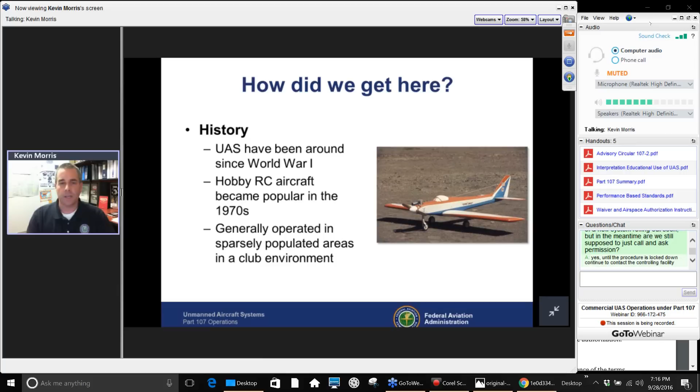So briefly, we want to go through the history of why we got here. UAS operations aren't new, they've been around a long time. You can go all the way back to the 50s and 60s with RC-controlled aircraft. It really became popular in the 70s, with folks building these from scratch or kits in their basement, forming clubs and operating in sparsely populated areas. This worked well for a long time.

In 1981, that's Advisory Circular 91-57. Currently we're on Advisory Circular 91-57A, a rewrite of this. But back in 1981 the FAA issued this saying, we recognize you're flying these model airplanes in the National Airspace System and staying away, so we came up with guidelines and operating standards, not a rule, but standards we expected the RC community to maintain. That worked well up until rather recently.

I believe this was in 2012. It changed because the knowledge and skill to operate remote-controlled aircraft changed. Back in the day you had to understand lift, thrust, weight, drag, and you spent time building it. Now you can have somebody walk into a store, buy a drone off the shelf, walk into the parking lot, hook it up to their iPad, and they're piloting a drone with no idea what lift, thrust, weight, drag means. That's not necessarily why Raphael Pirker got into a situation, but it's kind of what kicked this off.

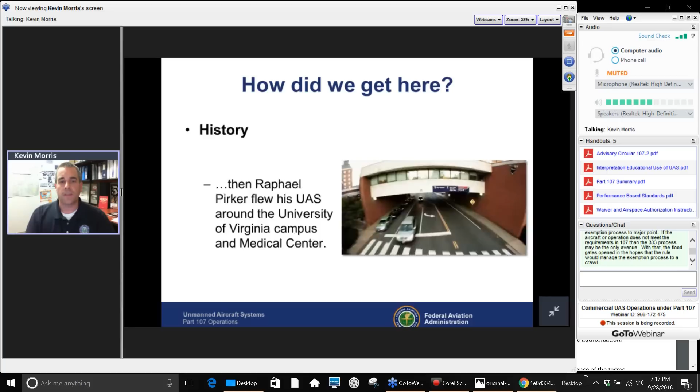Mr. Pirker operated his UAS around the University of Virginia campus and medical center, taking videos, swooping underneath and over and around heliports. That's what caught the FAA's attention. The FAA charged him with violating rules under Part 91, based on the position that unmanned aircraft systems, or UAS, are aircraft. He fought that and said no, it's a toy, it's my hobby.

We lost in the lower court. The lower court judge said, FAA, this is a toy, it's not an airplane, you have no standing. The FAA appealed that, and it got up to our highest appellate court, the NTSB. The NTSB affirmed the FAA's position: yes, unmanned aircraft systems are aircraft. That's the key decision we have right now and how the FAA got involved in all this.

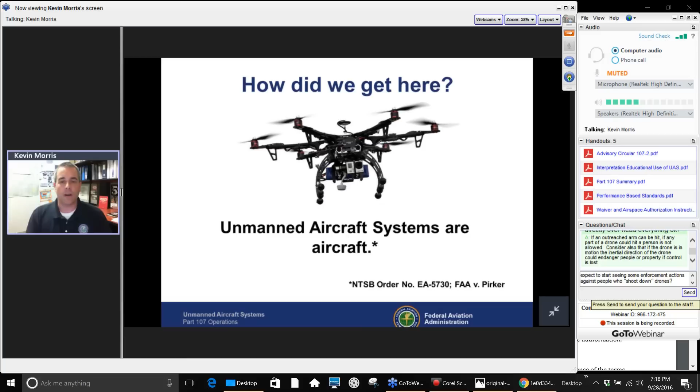Again, I'm not going to debate this. I know there are probably lawsuits and differing opinions on it, but as the law stands right now, unmanned aircraft systems are aircraft. You can reference that NTSB decisional order, FAA versus Pirker.

Shortly after that, Congress enacted the FAA Reauthorization Act, Public Law 112-95. This captured a lot of UAS or hobby operations. One requirement of this law was that the FAA establish a means for people to operate UAS commercially in the National Airspace System. The law goes into effect, and trumps congressional... well, it works the other way around, so we had to come up with a rule right away. That's where you got the exemption process, Exemption 333, our bridge from Public Law 112-95 over to Part 107 operations.

Many of you attending right now may have 333 exemptions, that was part of that process. Now, as of August 29th, we have FAR Part 107. This provides for civil, meaning commercial, UAS operations in the NAS, and it also certificates remote pilots. So that's where we're at today.

So I'm going to bring up another poll, the second one here, you should be able to see that pop up on your screen. It's discussing the experience you may have operating UAS. I'm going to let you answer that.

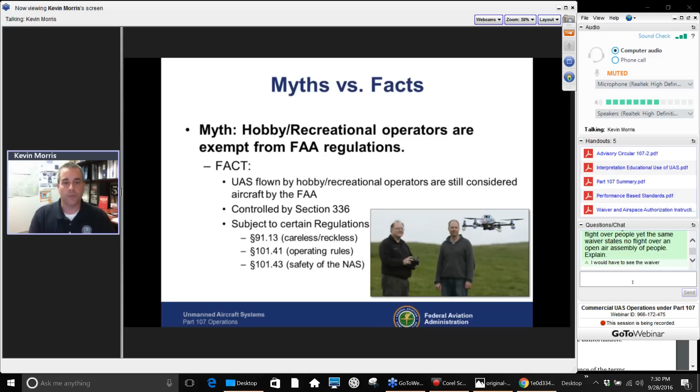Fact is, yes, we are responsible for the safety of all airspace from the ground up. This includes any airspace that is defined as navigable, and that extends to the surface. Aircraft have to take off and land. Unmanned aircraft have to take off and land. Therefore, they are navigating in airspace as soon as they come off the ground.

Where this came from, and what everybody likes to cite, is a 1946 U.S. Supreme Court decision under the U.S. versus Causby rule. So let me try to explain this a little bit. Again, we're not going to get into a heated debate on this. I'm sure there are opinions all over the place, but here's the deal.

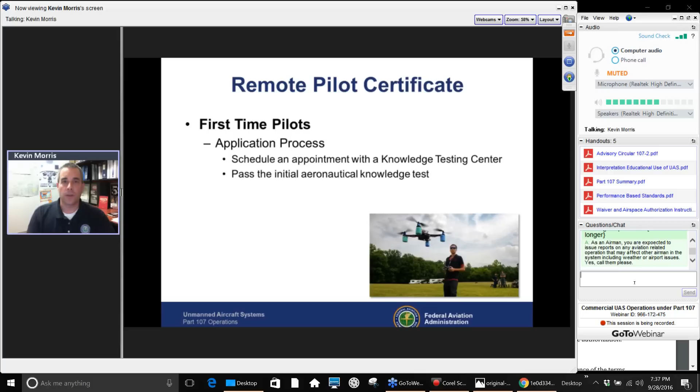After that, schedule an appointment with the Knowledge Testing Center and pass your initial aeronautical knowledge test. That test covers regulations relating to privileges, limitations, and operations, airspace, weather, loading and performance of the small unmanned aircraft, emergency procedures, and crew resource management, which may be a foreign term to you at this point. It also covers radio communication procedures, determining performance of your small unmanned aircraft, the physiological effects of drugs and alcohol, aeronautical decision making and judgment, airport operations, and maintenance and pre-flight inspection procedures. There's a lot of information you'll need to know to pass that exam.

Once you've passed the exam—and right now we're hovering around 87 to 88% success rate for people taking their exam the first time—that's a fantastic number. It means people are doing their homework.

Once you pass that test, you're going to complete your FAA Form 8710-13. What that really means is you go back into IACRA and complete a remote pilot certificate application. Once the TSA vets your background, you'll receive an automated email from IACRA allowing you to log back in and print out your temporary certificate. Later on, the permanent remote pilot certificate will be sent to you in the mail, but that's taking a while—some people are starting to get theirs now, but it'll probably come in waves. The key thing to remember for first-time pilots or non-current Part 61 pilots is that no additional signatures are necessary. You don't have to find a CFI, visit a physician, or find a designated pilot examiner. Just complete the application and submit it—Oklahoma City and Airman Records takes care of vetting and processing the application.

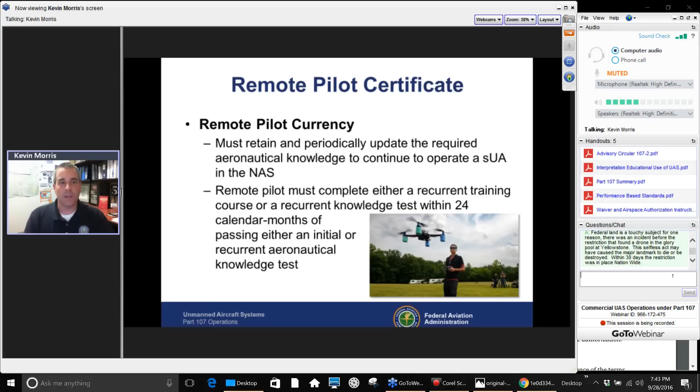This is done through either a recurrent training course or recurrent knowledge test, and it has to be done every 24 calendar months. What is that test going to be like? I don't know, we haven't issued it yet because nobody needs it yet. We just published the rule. Nobody has their certificates until at least August, or I should say nobody has to complete it until at least August of 2018. But here's kind of a good table.

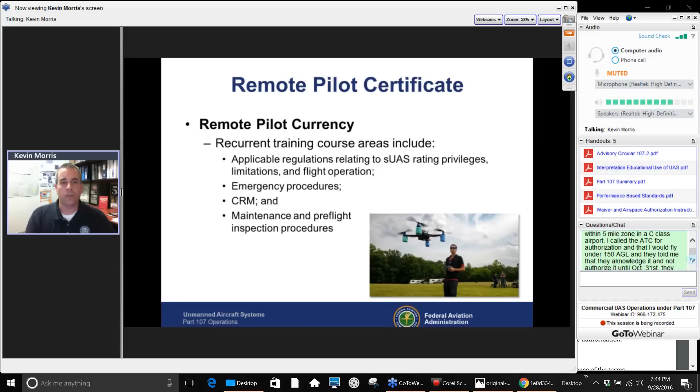The recurrent training course is going to include applicable regs, emergency procedures, CRM, maintenance and pre-flight inspection procedures. Again, we don't have the course developed yet, so I can't specifically tell you what it's like. Is it going to be the same as the UAG knowledge exam? Not quite sure, we'll have to wait probably a good year before we see some of that.

All right, so here we go. I hope you guys have your popcorn ready and your favorite beverage in hand because we're about to get into the meat of this presentation. I do have a planned break ahead, probably another 25 minutes before we hit that mark.

Bear with me as we get into the rules here with 14 CFR Part 107. We are going to go through every rule. For those rules which aren't that clear, or I felt need to be explained in more detail, I'm going to do that. But some of the rules are pretty straightforward, so we're not going to spend a half hour talking about one particular rule when it's easy to understand.

The first thing, Part 107.1, applicability. So who does this rule apply to? Every one of our rules starts out with a .1 applicability section. This particular rule applies to registration, airman certification, and operation of small unmanned aircraft systems within the U.S. We're talking civil, commercial UAS operations. It doesn't apply to air carrier, any aircraft subject to Part 101, which includes hobbyists and models, or operations under Section 333.

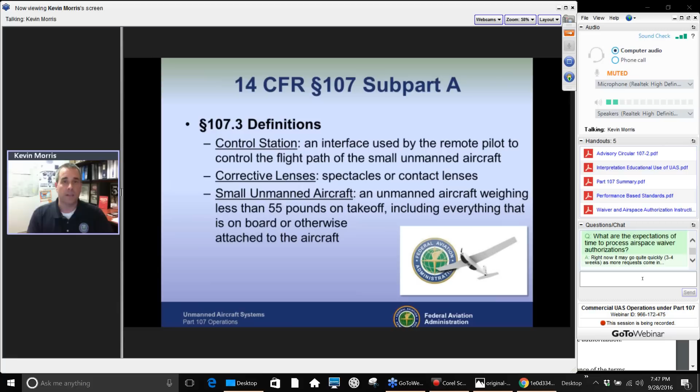Part 107.3 goes into definitions. We define what a control station is, what corrective lenses are, what a small unmanned aircraft is. For this rule, a small unmanned aircraft is anything weighing less than 55 pounds on takeoff, including everything you may attach to it, everything on board, cameras, whatever it happens to be. That means if the small unmanned aircraft weighs 60 pounds, you may not operate it commercially under Part 107. 107 only applies to small unmanned aircraft, which we define as something that weighs less than 55 pounds on takeoff.

We talk about unmanned aircraft systems, small unmanned aircraft system. When we're talking about sUAS or UAS, we're talking about everything involved - the aircraft, the data link, the control station, the flight controls, the computer software required to run it. That is the small unmanned aircraft system, kind of a holistic approach to it. Otherwise, we're talking about unmanned aircraft, and that's specifically the device that's flying in the National Airspace System.

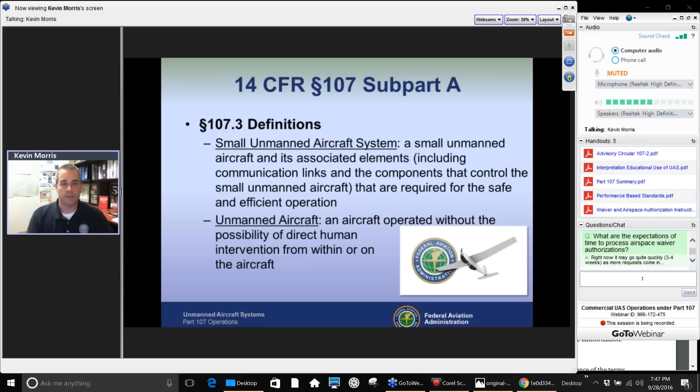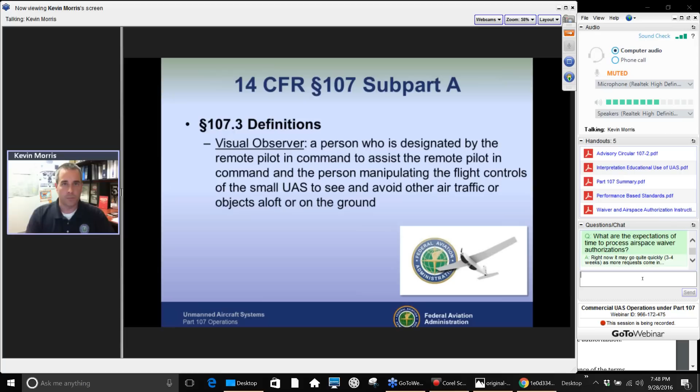Visual observer is defined - we'll talk about this a bit later, but a visual observer is designated by the remote pilot in command to help them keep the UA in visual line of sight at all times. It's not meant to be a daisy chain extension - it's not meant to be, I've got a visual observer a mile away, so I'm going to fly it over his head and then go a mile beyond him. I can't see it, but he can. That's not how the visual observer system works. So hang with me, we'll get there.

107.5 talks about falsification, reproduction, or alteration, essentially saying you cannot do anything that falsifies any record required by the FAA - that's your remote pilot certificate, could be an operations manual as part of a waiver you've received, certainly would apply to your waiver or ATC authorizations. You can't alter or falsify any of that. Registration would be followed too. If you do, you're looking at some pretty serious consequences - denial of application, denial of your certificate of waiver, suspension or revocation, or even civil penalty. We at the FAA can fine people for violations of the regulation. From personal experience dealing with cases involving falsification, it's generally revocation. It's one of the few things the FAA doesn't take lightly. This is highly an honor-based system.

We don't have enough inspectors to watch what you do every single day in the field. We are not going to be there for every single takeoff and landing. We expect you to operate as professional pilots in the National Airspace System, and as such, falsification goes against every ethical standard we'd have as a professional. I've seen the FAA go very diligently after pilot certificates for falsification. So it's certainly something that's real, and it's certainly something that's very uncommon. I should emphasize that.

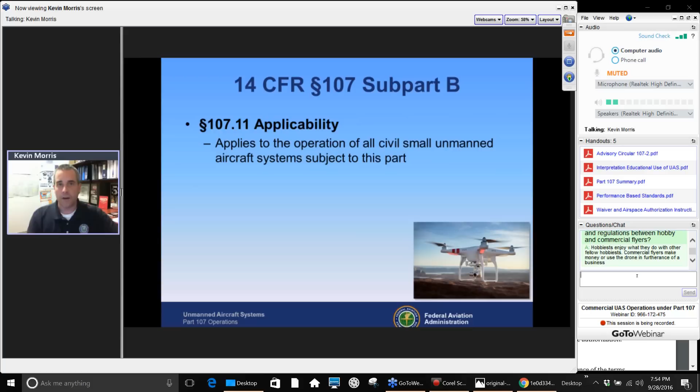Now, which ones are subject to this part? We covered that in 107.1, which is anything that's under 55 pounds, so on and so forth. We do require you to have a remote pilot certificate with a small unmanned aircraft system rating.

The rule reads: except as provided, no person may manipulate the flight controls of the small UAS unless they have a remote pilot certificate with a small UAS rating, or that person is under the direct supervision of the remote pilot in command, and the remote pilot in command has the ability to take direct control of the flight of the SUAS.

I apologize for reading that word for word, but some of these I unfortunately have to do that. The key point is that whoever is operating the SUAS under Part 107 has to either hold a remote pilot certificate issued under this part, or have that person who holds a remote pilot certificate standing right next to them with the ability to take command if something goes wrong. So that's the difference: you can have somebody operate your small unmanned aircraft under Part 107 without a remote pilot certificate, as long as somebody who has a remote pilot certificate is near them.

Now we get into remote pilot in command. You have your remote pilot certificate, and the FAA has this other thing called remote pilot in command. Folks who hold Part 61 pilot certificates are very familiar with the term pilot in command, so I'm going to bring it to you guys as well. The rule states: except as provided, no person may act as remote pilot in command unless they have a remote pilot certificate with a small UAS rating. We require a remote pilot in command on every flight.

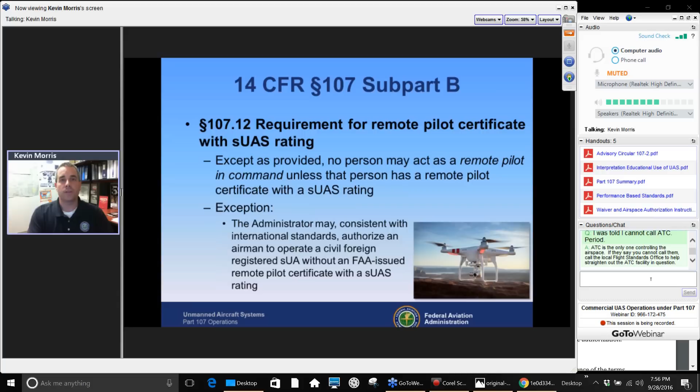There is an exception in there dealing with civil, foreign, registered, small unmanned aircraft — I'm not going to really get into that. For our discussion, every single UAS flight under Part 107 must have a designated remote pilot in command who holds a remote pilot certificate. As you saw in the previous slide, that person doesn't necessarily need to be flying the UAS, but if they are not, they need to be right next to the person that is, particularly if that person does not have a remote pilot certificate.

We do not require medical certification for you to operate your UAS under Part 107. You don't need a third-class medical, and you don't have to visit an aviation medical examiner. However, if you have any reason — whether you know or have reason to know — that you have a physical or mental condition which would interfere with the safe operation of the SUAS, you may not operate under Part 107.

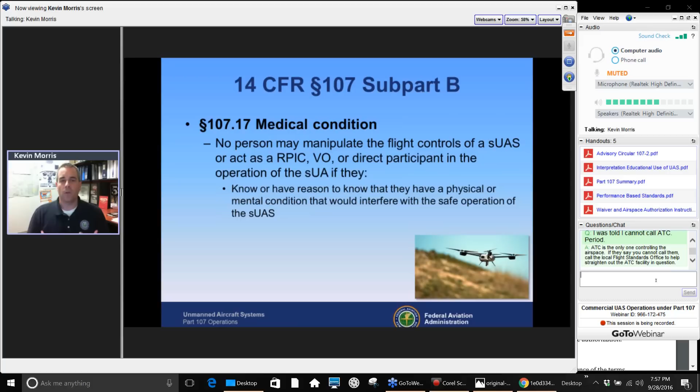This is a big self-certification piece. If you go out with some sort of medical issue, or should know that you have a medical issue, and you choose to operate and something goes wrong, the burden is on you for that medical self-certification. You can't say, 'I know I couldn't see straight yesterday, but I decided to fly anyway and I hit a tree.' If you can't see straight, how did you have reason to believe you wouldn't interfere with safe operation? The bottom line is it's self-certifying — are you physiologically capable of flying that UAS safely? That's what we need to know.

So again, a remote pilot in command, under 107.19, must be designated before or during the flight of the small unmanned aircraft. They are directly responsible for and have the final authority as to the safe operation of that small UAS in the NAS. They have to ensure it doesn't pose any undue hazard to other people, aircraft, or property in case that UA loses control for any reason. They must ensure the UAS complies with all of Part 107.

If you're the remote pilot in command, you are the captain of that aircraft — you're wearing the four stripes. You go to the airline terminal, see the pilots walk around with four stripes on the shoulder, they're the captain, they're the pilot in command. You guys are going to be the remote pilot in command of your aircraft. You must have the ability to direct the small unmanned aircraft to ensure compliance. You're in charge — it all falls on your shoulders.

One of the things an FAA inspector could ask if they visit you during a mission is to see your remote pilot certificate, if you're going to be the remote pilot in command. You should have that with you, not at home or in your car. It's something you carry with you, just like all manned aircraft pilots carry theirs at all times. I recommend the same for you guys.

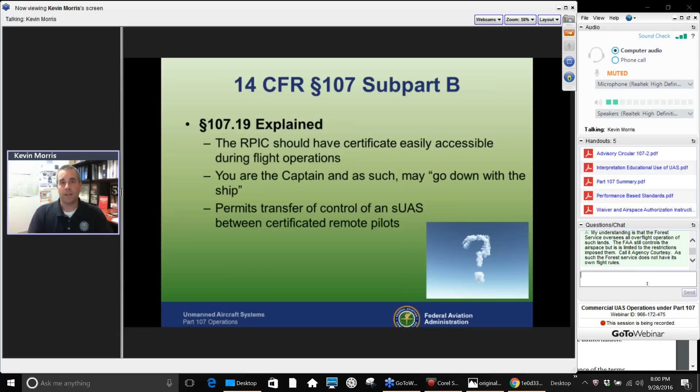What 107.19 does allow is transfer of control of a small UAS between certificated remote pilots, meaning you can pass off that remote pilot in command responsibility. In transferring control, both of you must be capable of maintaining visual line of sight without any loss of control. It can't be done where one of you loses sight of it momentarily. The transfer must happen while both of you can see the UA. So you have one pilot designated as the RPIC at the beginning of the flight, and at some point during the operation you can transfer that responsibility and control, as long as it's done in a positive manner so that nobody is doing this when something goes south.

So if you're going to be transferring remote pilot command authority, it must be clear and unambiguous, meaning: 'You've got the aircraft, you're remote pilot command.' 'Roger, I've got the aircraft, I am remote pilot command.' However it works out. What you don't want to have happen is, 'I think I passed it off to that guy,' and now it just went through the school window, and the FAA and the police just showed up, and he was the remote pilot command, and he's like, 'Well, no, you were the remote pilot command, I never took it.' That has to be positively communicated between the two of you.

If you have an in-flight emergency requiring immediate action, you may deviate from any part of this rule to the extent necessary to meet that emergency. It doesn't give you a blank check to violate every rule in the book, but it gives you the green light to deviate from any rule in this part needed to ensure the safety of the NAS. If something's going wrong with your UAS, an in-flight emergency, whatever it happens to be, do whatever it takes to keep the national airspace system safe and keep people around you safe. You are the captain. You save the ship, you save the people. That's your job. Deviate from the rules as necessary.

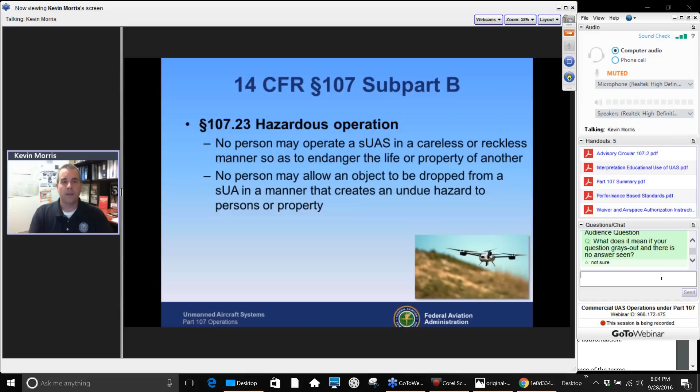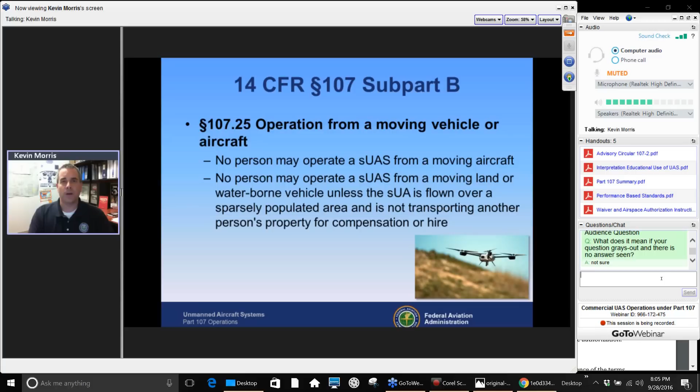If the FAA inspector comes out and says, this is like the middle of downtown Atlanta, where are you getting that from - that will be up to you and the courts and something to decide later on. But we do not define sparsely populated area. So you can Google it and try to find some answers. Some lawyers have written about it in different cases, but officially there's no definition for that.

So again, you can operate from a land or waterborne vehicle over a sparsely populated area. It doesn't remove any visual line of sight requirements. You still have to maintain VLOS with your small UA, and you got to make sure that it doesn't unfairly risk any people or property or anything of that nature.

Alcohol or drugs. Right now we have a rule in 107.27 that redirects you to another rule in Part 91. This is fairly common when you get into reading FAA regulations. Any Part 61 certificated pilot will tell you that you read one rule that references this, unless this rule over here says this, which ties you to that rule over there. It's how the rules are written. So welcome to the FAA, welcome to our rules.

107.27 will redirect you to 91.17 and 91.19, which state within 8 hours after consumption of alcohol, you may not operate the UAS. You got to have what the pilots like to say, 8 hours bottle to throttle. You got to have that time in between. If you're under the influence of alcohol or any drugs, or if you have a blood alcohol content of 0.04 or greater, you may not operate under Part 107.

Daylight. You may not operate at night. You may operate in periods of civil twilight, as long as your small unmanned aircraft have anti-collision lighting on it that can be seen for at least 3 miles.

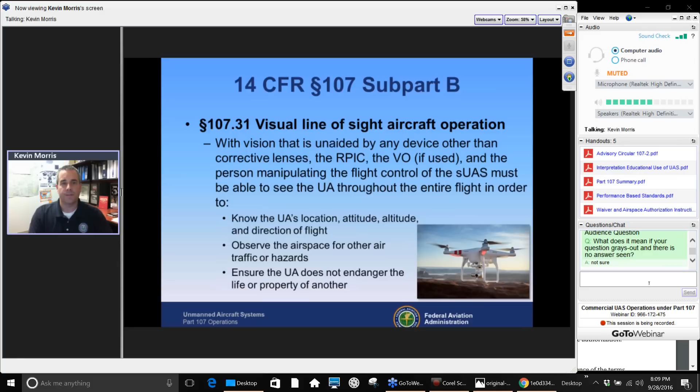That has to be done by the remote pilot in command and the visual observer. You can't pass that off. It has to be within visual line of sight at all times. So throughout the entire flight, that ability must be exercised by either the remote pilot in command of the sUAS or a visual observer.

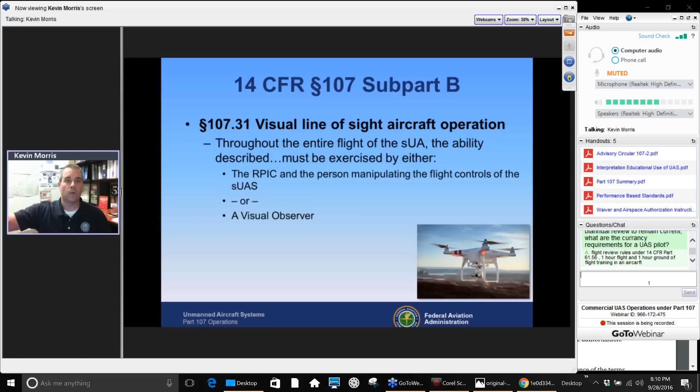I'm going to explain this real quick. The intent of the visual observer is not to relieve the remote pilot in command of VLOS responsibility. It's designed to allow the remote pilot in command to temporarily lose visual line of sight with his UAS by looking down, adjusting something, or working on a system or software component. The visual observer can maintain visual line of sight with the aircraft while the remote pilot is heads down. It doesn't mean the device can be flown somewhere the RPIC can't see it, but the visual observer can. So if a visual observer is used during that operation, all the following requirements must be met.

The remote pilot in command and the visual observer must maintain effective communication with each other at all times. That means I have to be able to talk to you, and you have to be able to talk to me. That can be done electronically, walkie-talkie, cell phones. We don't get into too much detail, but we do specify effective communication. Whatever medium you use between the remote pilot in command and your visual observer, it has to work. It has to be effective.

The remote pilot in command must ensure that the visual observer is able to see the UA in the manner specified previously. Again, it has to maintain visual line of sight. We don't have a rule that permits beyond visual line of sight operations.

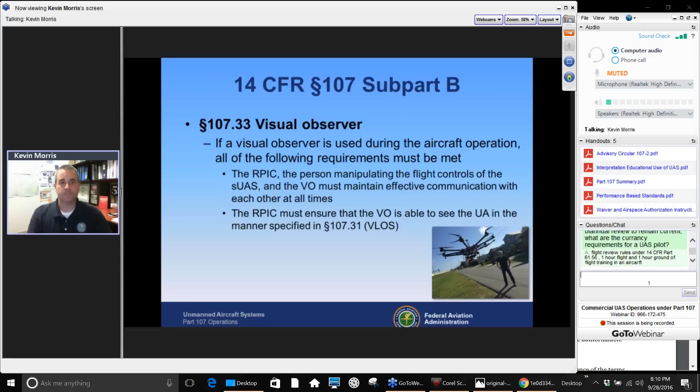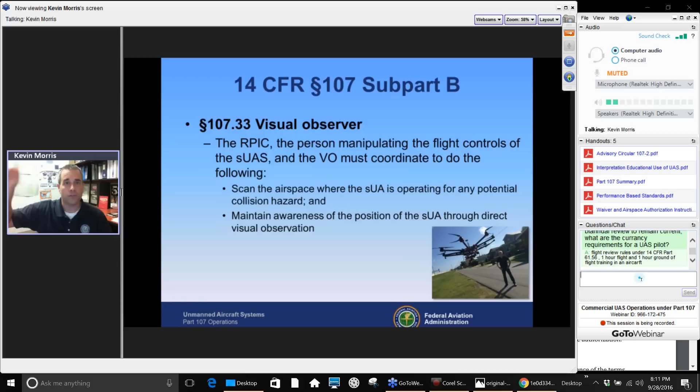Coordination between the two is outlined in 107.33 between the visual observer and the remote pilot in command. This coordination is designed to scan the airspace where you're operating your small unmanned aircraft, identify any potential collision hazards, and maintain awareness of the position through direct visual observation. That ties to me as a remote pilot looking down, temporarily adjusting something. My VO is watching my UAS, whether it's in hover mode or tracking a GPS track. I have the ability to maintain visual line of sight because I can always look up and see it, but they are physically eyes on the bird at any given time.

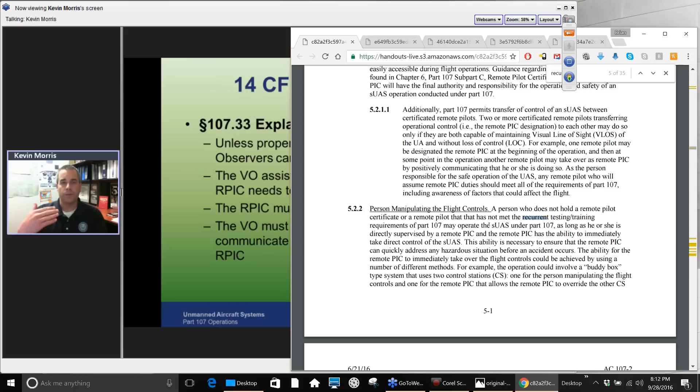Now, unless properly certificated and equipped, visual observers cannot assume remote pilot in command responsibilities. You can't pass off your RPIC duties to your visual observer unless they happen to be a remote pilot with that certificate and accept that responsibility. So they assist you: if you go eyes down, the visual observer is there to assist. You, as remote pilot in command, must still be able to see your unmanned aircraft within visual line of sight at all times. This doesn't relieve anybody of that, and effective communication must take place.

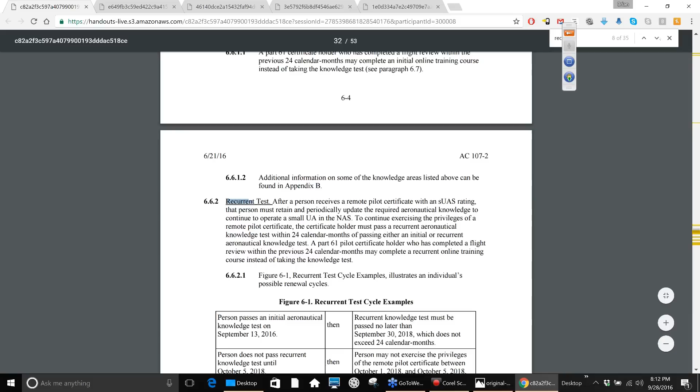Don't necessarily care how you do it, but you have to have effective communication between the visual observer, because if the visual observer is far enough away where maybe they can't shout at you very effectively because of highway noise, and you go heads down and they see something happening that's dangerous, they have to be able to communicate with you instantly, whatever means you do that. So that could be voice, handheld radio, any real method that creates effective communication and does not create a distraction. Texting probably isn't the best idea to maintain effective communications between a VO and the RPIC.

In terms of operating multiple small unmanned aircraft, you may not. A person may not operate or act as a remote pilot in command or visual observer of more than one unmanned aircraft at the same time. Now, this is going to be one of those rules that's waivable. We'll get to that here in a little bit.

You cannot carry hazardous material. And for the purposes of Part 107, we define hazmat as, I'm just going to let you guys read that. It goes to the Secretary of Transportation. It talks about health and transporting and commerce, things like that. We pull the definition out of 49 CFR 171.8. So that's how we define hazardous material.

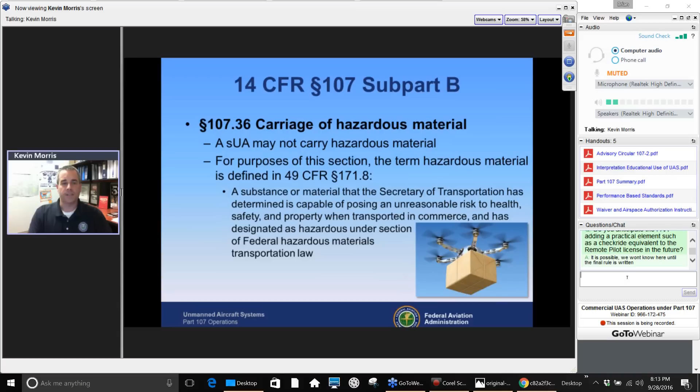All right, pretty exciting stuff there. I'll give you guys a second to read that and jumping forward.

If you're going to operate near aircraft, here are the right-of-way rules under Part 107. You must, as a small unmanned aircraft remote pilot in command, yield the right of way to all aircraft, airborne vehicles, launch, and re-entry vehicles. You have the responsibility to get out of the way. In terms of operating near them, you may not pass over, under, or ahead of it unless you are well clear. What does well clear mean? Look at it from a safety standpoint. You want to be so far away that it's not going to create an undue hazard. Be well clear. You may not operate so close to another aircraft to cause a collision hazard. Pretty self-explanatory on that one.

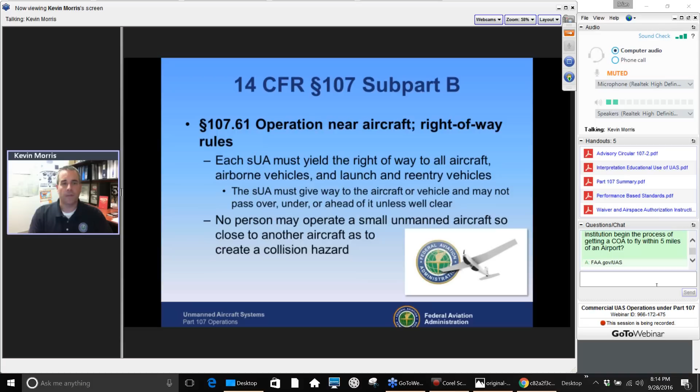Operating over people. Oh, this is a good one everybody likes to talk about, and especially since our administrator mentioned it was one of the first rules that we're going to be looking at here short term to potentially modify. We'll have to see. But 107.39 prohibits operating over a human being. Apparently aliens are okay, unless that human being is directly participating in the operation of that small unmanned aircraft, or they're located under a covered structure or inside a stationary vehicle that provides reasonable protection in case that UA came down on their head. The first bullet point under there is where everybody starts to kind of diverge in terms of who is directly participating in the operation of that small unmanned aircraft.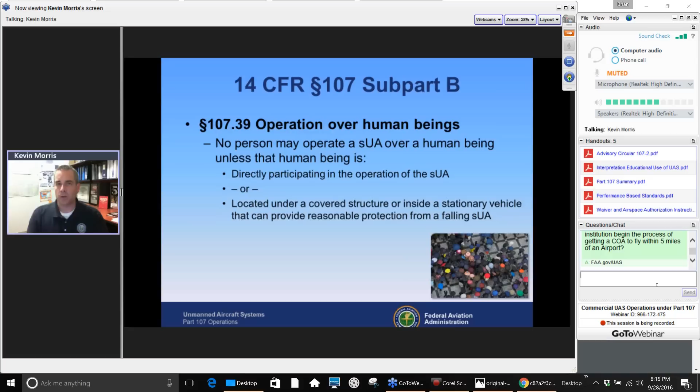So here's what we define. This, I believe, comes straight out of Advisory Circular 107-2, which is one of the handouts you can download. People directly involved with the operation of the small unmanned aircraft system are the remote pilot in command, or another person manipulating controls as provided by rule here, the visual observer, or any crew members necessary for the safety of the small unmanned aircraft system operation as assigned and briefed by the remote PIC.

So one of the questions we get a lot, what about actors? What about the movie talent or whatever it happens to be? Are they participating in the operation? Because we're filming their scene with the UAS. The way this reads is no. The actors or talent involved are not directly participating in the operation of the small unmanned aircraft system. You got to look at those 4 bullet points. The people you can fly over legally under Part 107.39 are one of those 4 groups. Either the pilot in command, manipulating the controls, the VO, or crew members necessary for the safety of the operation. Actors, talent aren't necessary for the safety of the operation. Filming a marathon, you can't tack up a sign that says, hey, we're going to be shooting this marathon with the UAS. You guys are all participating now. Doesn't work like that. They have to be directly related to the safety of the UAS operation.

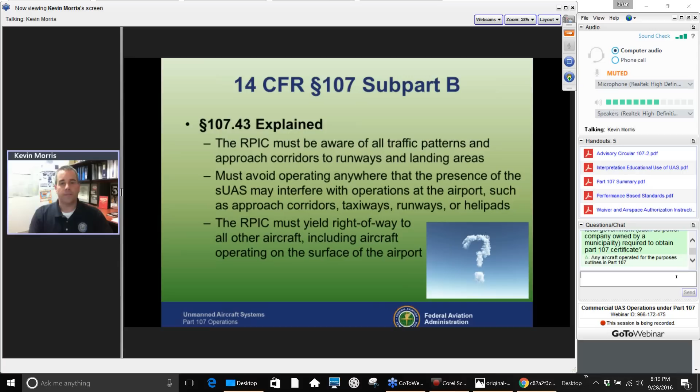One of the explanations given in Advisory Circular 107-2 is this: if you're hovering your unmanned aircraft 200 feet above a runway, and let's say there's no other airplanes around and you've done your due diligence, and now an airplane taxis up and is holding short of the runway, and they cannot take off because you're hovering over there - in effect, you have interfered with the operations at the traffic pattern at an airport. It would be in violation of 107.43.

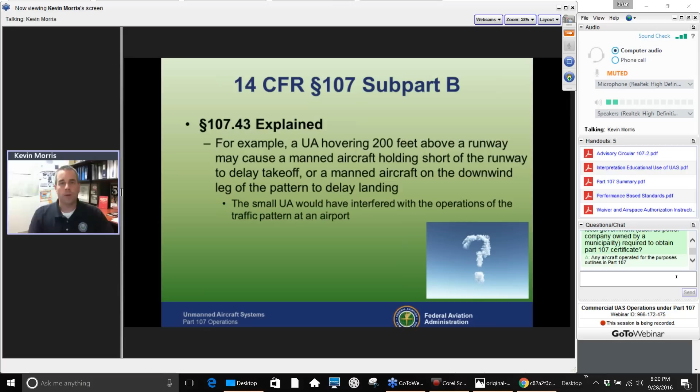So before you go carte blanche operating into airports in Class G, or heliports, or seaplane bases, have a very good understanding of how that airport operates. How do you do that? Contact the airport operator. Open up that dialogue, open up that discussion. Be safe.

Operating in prohibited or restricted areas is not that different from manned aircraft. You may not operate a small unmanned aircraft in prohibited or restricted areas unless you have permission from the using or controlling agency, as appropriate. For folks that aren't really in tune with how that works, what is the using agency or controlling agency?

So what I have on the screen now is a restricted area. This is straight off a sectional chart. Now, keep in mind, this is not a lesson to teach you how to pass the UAS knowledge exam, but I want to emphasize this part here, 107.45. Restricted area 4301 shows up on the map. I'm going to try something which to me is next level cool, because I'm a little bit old.

Say you wanted to operate in this area here that I've circled on the map, horribly. Could you? How do you know? Does it go to the surface? Who do I contact? Is it part of this Miller Army Air Force base? What is that?

So here's what we do. You have to look at the side panel of the sectional. If you've never owned a sectional, they're getting harder to find these days, but go out and try to find one. This is what the side panel looks like, for the particular Twin Cities sectional chart. If you go down, you find the special use airspace and see, oh, restricted area R4301, that's the one I want to operate in. Oh, it goes up to 27,000 feet.

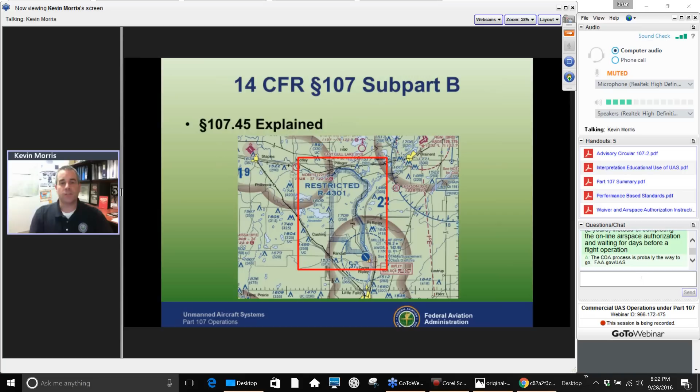Now, they will probably most likely coordinate with Fort Ripley, Camp Ripley in that area, but that's who the controlling agency is, Minneapolis Center, and that's how you find out. That's the same for prohibited area, restricted area. A lot of military operations areas are the same way.

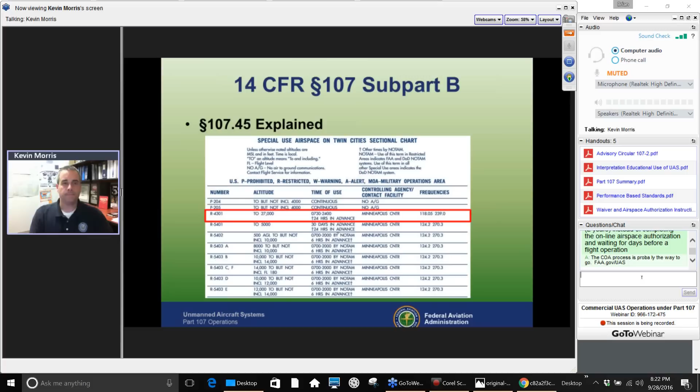This rule 107.47 is the TFR rule. Essentially, we identify, like you're now starting to get used to, we redirect you to part 91.137 through 145 and 99.7, what really amounts to TFRs.

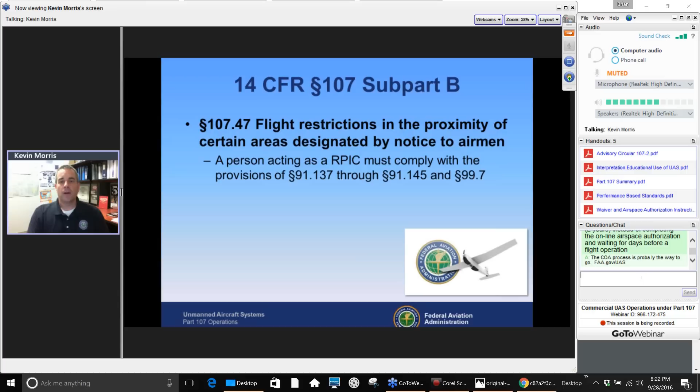So you may not operate a UAS in TFRs, whether it's in the vicinity of a disaster hazard area, national disaster areas in the state of Hawaii, emergency air traffic rules, flying too close to the President of the United States or other dignitaries.

Or flying too close to where they're doing space launches off of Cape Canaveral, or we have a rule for abnormally high barometric pressure conditions.

There's also kind of the permanent TFR that exists, which is the stadium TFR, people like to call it, that exists over certain stadiums of a seating capacity and type of venue.

Regardless of which TFR it happens to be, no UAS operations are permitted inside a TFR.

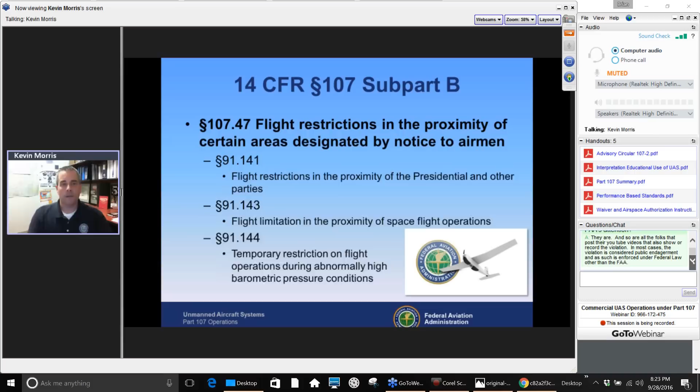I got a couple more on here, I guess, but essentially they're saying the same thing. TFRs, no fly. If you got a TFR active in the area, you're not going to go flying that particular day. And I'll show you how to find out here later on.

You are required to do a pre-flight on the UA. You can't just unpack it out of its shipping crate or unpack it out of its protective case and launch it. You have to, as the remote pilot in command, assess the operating environment, consider all the risks to people

or property in the immediate vicinity, on the surface, and in the air. These are things that you have to do prior to flight, not just one flight, all flights.

You have to complete this. Your assessment must include local weather conditions, airspace, and any flight restrictions, i.e. TFRs, the locations of people or property on the surface, any other ground hazards which may play a role in

your operation. And you must ensure that everybody directly participating in the UA operation is informed about the operating conditions, emergency procedures, so on and so forth. This gets back to people who are participating in the direct operation of your small unmanned aircraft.

Back when we were talking about operating over people, this is the briefing that you have to give them. You have to ensure that anybody participating in that safe operation knows the operating conditions, emergency procedures, contingency procedures, roles and responsibilities, potential hazards. That's your responsibility as a remote pilot in command.

There's a lot of responsibility on your shoulders. You have to ensure that all control links between the station and the unmanned aircraft are working properly, and you must ensure that it has enough power to fly for your intended mission.

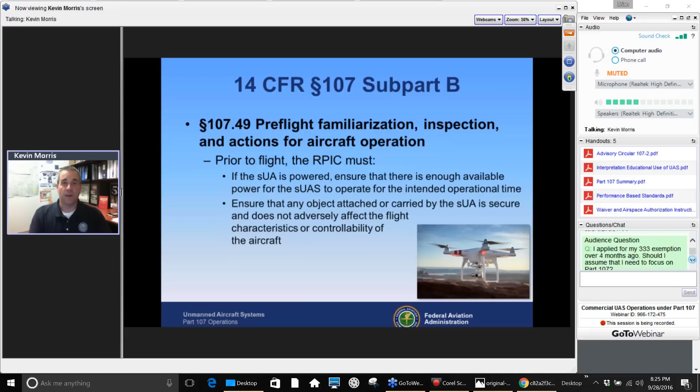This is similar to manned aircraft pilots, making sure there's enough gas in the tank to get where they're going. And make sure that anything you've got mounted on the bottom, GoPro cam, or whatever type of video device or sensing device, doesn't fall off, essentially what that boils down to.

We provide a lot of publications on this. We have topics on aviation weather, aircraft loading performance, emergency procedures, ADM, airspace. These are all free. You don't need to pay for any of these.

If you go to our FAA website and you find the handbook section, or use Google and just type FAA handbooks. All of them are in PDF format.

All of them are free. You can download that, put it in your tablet or computer, whatever device you want to use.

All right, but in addition to all that, make sure that the device is capable of flight. Do the propellers operate as they should? Do the control system operate as it should? Do you have adequate power? So on and so forth.

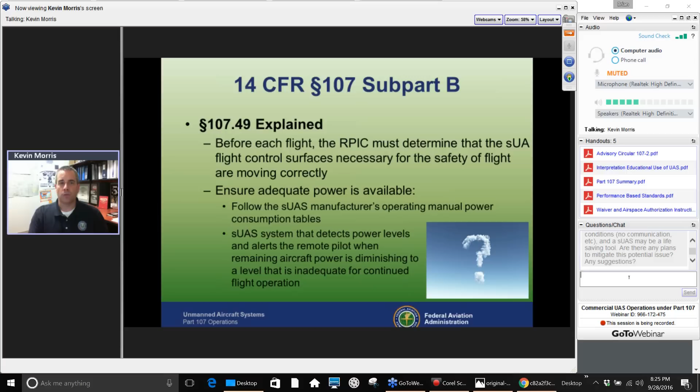Make sure that whatever you have at the bottom doesn't fall off, and then make sure that you have documentation with you. If you're operating under a waiver, you're going to want that waiver with you. You're going to want your remote pilot certificate with you.

You're going to want the aircraft registration with you. These are all things you have to have ready to go prior to flight. You are the captain, you need to have these documents with you.

Operating limitations: here's the nuts and bolts of actually flying the device. We limit it to a ground speed of no more than 100 miles an hour, and you have to have at least 3 miles of visibility observed from the location of the control station. So wherever you're at, you have to determine that your flight visibility is at least 3 miles.

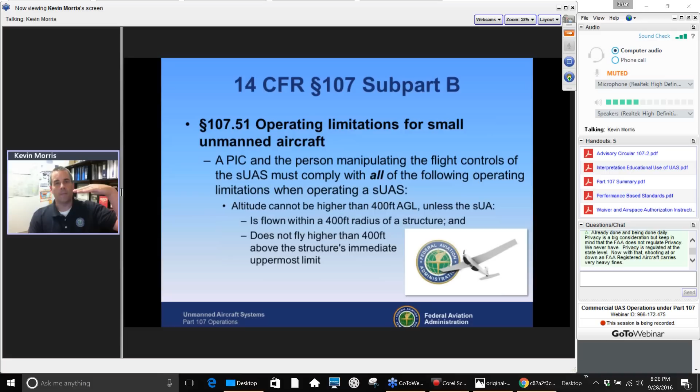You cannot fly higher than 400 feet AGL unless you're within a 400-foot radius of a structure. Then you may fly up to the top plus 400 feet above that structure's uppermost limit. If the radio antenna is 1,000 feet tall, you may operate within a 400-foot radius of that up to 1,400 feet AGL. That's what this rule permits you to do.

You do have to maintain cloud clearances. You have to be at least 500 feet below and 2,000 feet to the side of any cloud. You cannot fly above the cloud.

So why do we have these? Among other things, we want you to have the ability to make adjustments, to identify hazards and react to them, to make sure you're maintaining safety and taking appropriate actions.

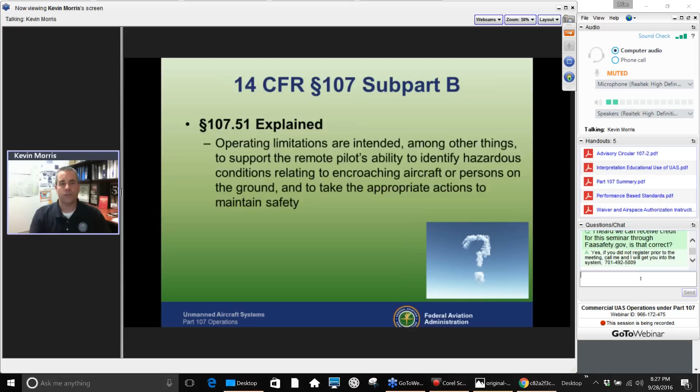There are a lot of different ways to determine ground speed. Quite frankly, if you own and operate a UAS, you know the best way for you to determine ground speed, but that's the controlling factor: ground speed.

Same thing with altitude. Most of these references are in AGL, above ground level, but you really want to understand the difference between MSL and AGL altitudes. If you don't, time to hit the books. But again, determining altitude is probably best left to you guys, since you know the UAS system best and how it relates that information to you.

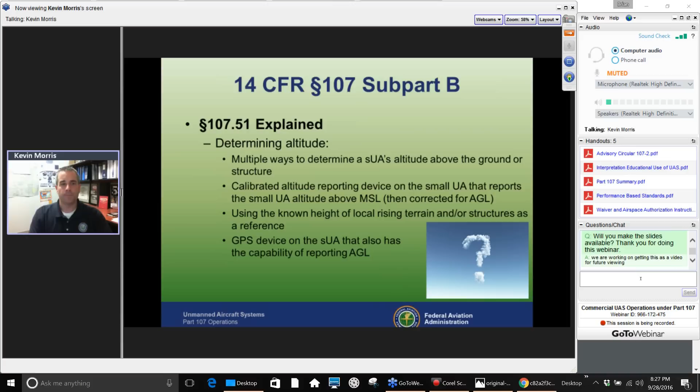Cloud clearances, how do we do that? Your eyeballs are probably the worst, most uncalibrated tool to determine cloud clearances. So the best way to do that is to obtain local weather reports in an aviation format.

Where are the clouds at? What are the bases of the clouds at? Because if I know the bases are at 1,000 feet, I know I have to be 500 feet below that, so I'm going to be limited. Even if I'm within a 400-foot radius of a structure, I'll be limited to 500 feet AGL max because of where the clouds are sitting.

Don't forget your local laws and regs. Just the state of Minnesota, I can tell you, is going to require that you register your UAS with them, that you have a commercial operating license with them, and that you prove minimum insurance requirements to them. The FAA does not require insurance.

We don't require a commercial operator license, so to speak. We issue registrations for $5, and we issue remote pilot certificates. That's our requirement. But every state's going to have their own set of rules, and if they don't have them now, they probably will very soon. Check with your state—just because you've met all the FAA requirements doesn't mean you've met your state requirements.

I can't emphasize enough, we don't regulate privacy at the FAA. That's not what we do, it's not what we have regulations for. But many cities and states do, and they have very specific privacy laws. And you're kidding yourself if you don't think they're talking about how to control privacy with drones right now, because they are. I've been involved with legislatures here in the state of Minnesota—it is a topic being discussed right now. So know your local laws.

All right, we are back. Here we go. Just a quick shot of numbers. It looks like nobody deserted us during the break. Hey, that's a good thing. Either you guys don't have a lot going on, or this is actually some pretty good stuff. Either way, I'll take that.

So we have a tremendous amount of questions rolling in. Thank you guys for all those questions. I know a lot of it has to do with ATC authorizations and clearances. I talked with Jay, who's kind of running some of the questions offline. He may have given some outdated information, so listen, follow, stay with me here. We're going to go through this, and I'll get you guys up to speed.

So other than the rule, this is what everybody wants to talk about: waivers and authorizations. Before we get going into waivers and authorizations, I want to talk about some definitions. There are so many of these definitions right now being used interchangeably out there. I've seen it online in social media forums, or I've just been talking with remote pilots or people talking about UAS.

I thought it'd be a good idea to clear this up a little bit. So the first thing I want to talk about is exemption. An exemption is a request made by an operator to not comply with the rule as written, but use an alternate method of compliance which ensures safety in the NAS. They are generally approved by headquarters. Think 333 exemption, all right? Those are issued to exempt commercial UAS operations from regulations, and they had a conditions and limitations section of that exemption which outlined the alternate method of compliance. That is an exemption.

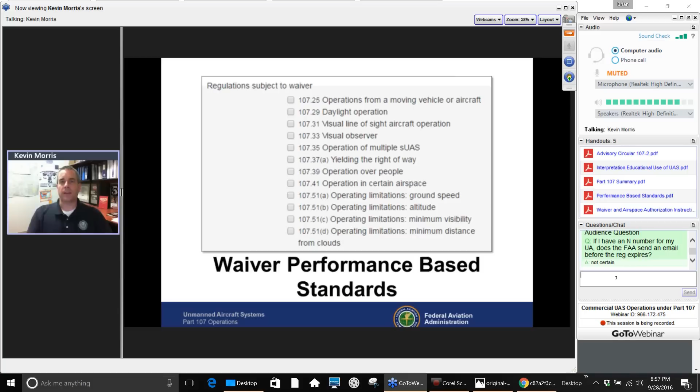So what are these performance-based standards? What do I have to identify to the FAA to move forward with my waiver request? So we may issue certificates of waiver authorizing deviations from any rule in 107.205 if the UAS operation can be safely conducted under the terms of that certificate of waiver, COW. So your request must contain a complete description of your operation, the justification that establishes the need for the waiver, and that it can be conducted safely under that term.

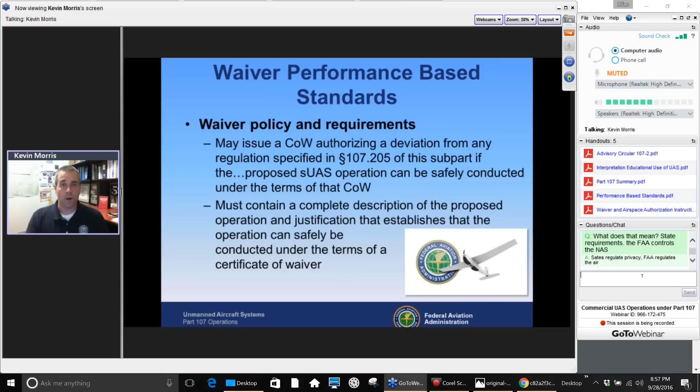We're not just going to be handing out waivers because you think someday you might decide to operate maybe at night. If we're going to waive a rule - and this isn't something we're making difficult for UAS, it's the same for manned aircraft - if we're going to waive a rule, there has to be a specific reason why. The rule is in place to ensure safety. What you're asking is to not comply with that rule, so we want to know why. So you're going to need a legitimate reason. Once you receive that waiver, you may deviate from the regulations of that part to the extent specified in your waiver. Simple as that. If there are conditions and limitations in your waiver, you must comply with those as well - all of them, not just one or two.

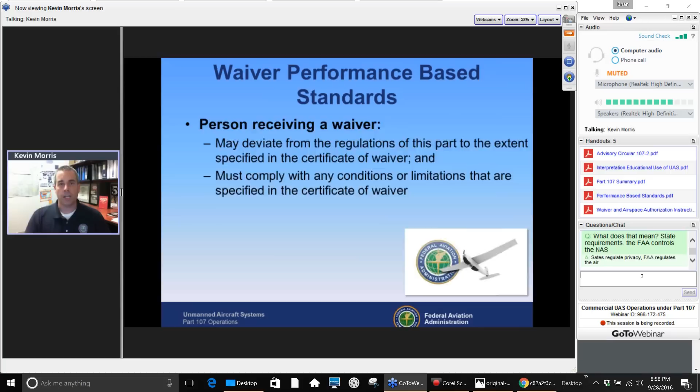So here's how we do it. If you want to receive a waiver for operating from a moving vehicle or aircraft, you have to demonstrate a method to ensure you evaluate the area for hazards, you analyze the risk to people and property, and you control or eliminate those risks. You have to ensure visual line of sight is maintained from a moving vehicle. You have to ensure that everybody involved is free from any distractions, and you have to ensure any lost data link procedures account for dynamic location of the RPIC.

Dynamic location, yeah, you're not standing in one spot. You're in a car moving down a road, or maybe in an airplane if you're trying to request that waiver. You have to ensure that.

By the way, these performance-based standards are all available in one of the handouts. If I look over here quickly, I can pull up my handout list titled Performance-Based Standards. You can download that if you can't capture all this on the screen, because I'm going to go through this a little quickly in the interest of time.

The other one is daylight operation. You want a waiver for that? You have to be able to maintain visual line of sight during the darkness hour. You have to have a method to avoid other aircraft, people, or ground-based structures. You have to know the position, altitude, and attitude of the small unmanned aircraft. And you have to make sure anybody participating is aware of any visual illusions that occur at night or any physiological conditions which may degrade night vision.

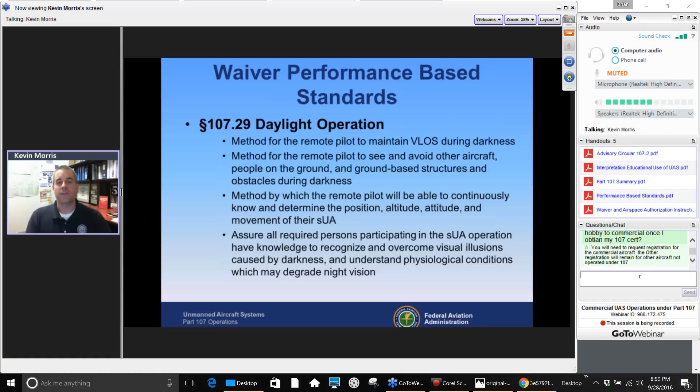Again, we specify this in that handout. So if you're going to request a waiver for daylight operation, these are the bullet points you need to identify to the FAA for how you're going to do your operation. You have to be able to increase the conspicuity of the UA to be seen at a distance of 3 miles, unless something is in place that avoids all non-participating aircraft.

I'm not going to go too much into that, but I wanted to give you an idea of what our performance-based standards are. You want to operate beyond visual line of sight, here's your performance-based standards. You're going to see a lot of these standards repeat throughout all these different waivers, but this gives you one step ahead when you make that waiver application. You'll know you need to do this because it's a performance-based standard, so you put that in.

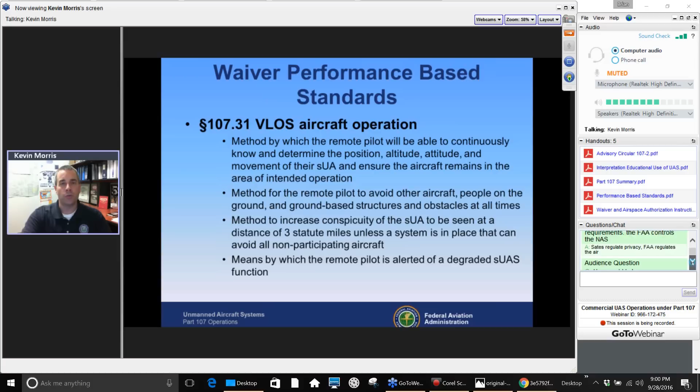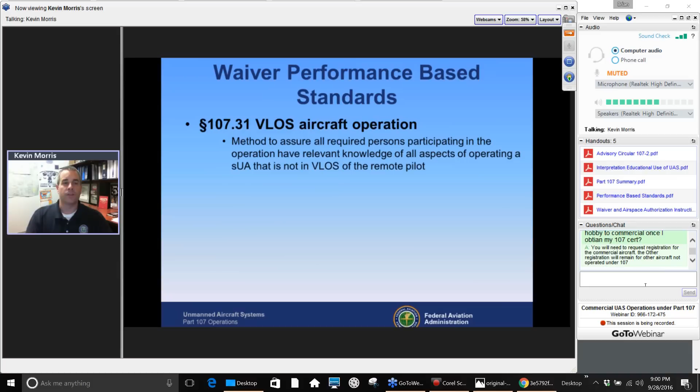Every little bit helps. Every little bit you do here on the front end speeds up the process on the back end. One of the other requirements is making sure all the required persons participating have relevant knowledge of the UA and that it's not operating beyond visual line of sight.

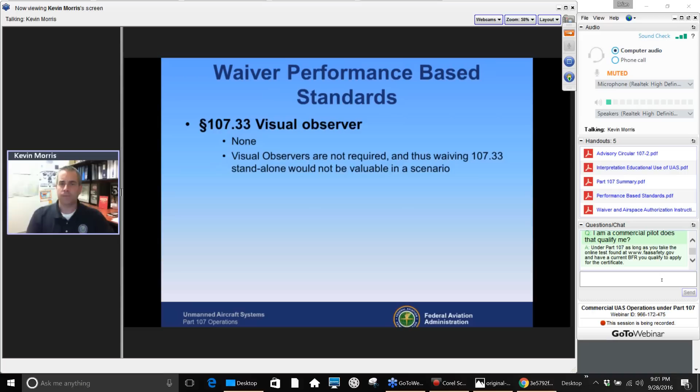We waive 107.33, but it doesn't seem like there's any good reason yet to waive that. So we have no performance-based standards to waive the visual observer. Because visual observers are not required, there's no necessarily good reason to waive it unless you're combining it with something else. As a standalone it doesn't make sense, but as a combination with another waiver, it would make sense for you to not have a visual observer. Again, I'm not sure why we have that, but it is there.

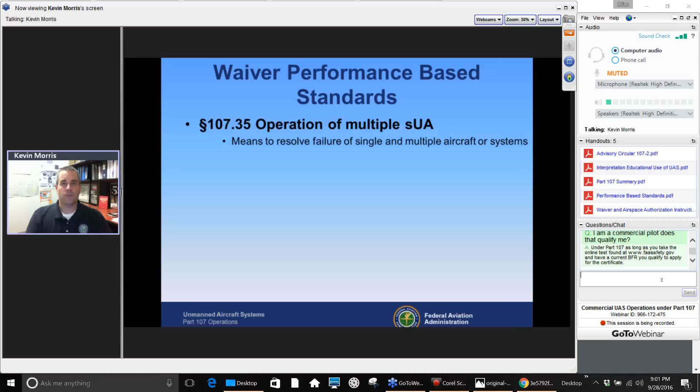You can apply to waive the rule saying you can only fly one small unmanned aircraft at a time. If you're going to do that, you have to have a means to resolve failure of single and multiple aircraft or systems. That's what you have to somehow identify to us here at the FAA.

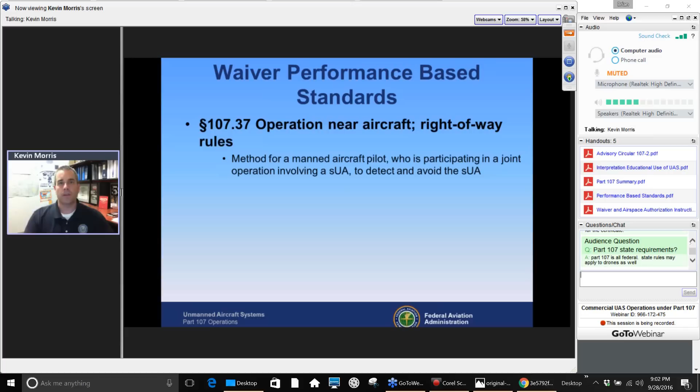We can waive operating near aircraft, and for some reason we can waive right-of-way rules. If you're going to waive the right-of-way rules, you have to have a method for the manned aircraft pilot involved in the joint operation to detect and avoid you. You can't just apply for this waiver and say every aircraft has to give way to my super UAS. It's a joint involvement with the manned aircraft.

Operating over human beings. Here we go. I'm going to explain this one because it's probably the most questioned one we have. If you want to operate over humans, you can apply for a waiver. That waiver application must identify that you have a method that ensures any malfunction doesn't cause injuries to non-participating persons on the ground. You have to have some way to keep people safe underneath you.

You have to mitigate risk to non-participants through operational risk assessment, testing data, addressing design features with software, whatever happens to be on your UAS that you believe is a good tool to prevent hurting people, you want to identify that. You also need to address the risk from rotating parts.

Those blades, when they come down, they will cut you, as some of you may already know, and they certainly have sharp edges, so we have to have a way to address that risk of exposure. You have to be able to show that the remote pilot in command, or whoever's manipulating the controls of the small UA, has adequate knowledge, experience, and ability to safely operate that UA over people, including recent flight experience from the last 30 days.

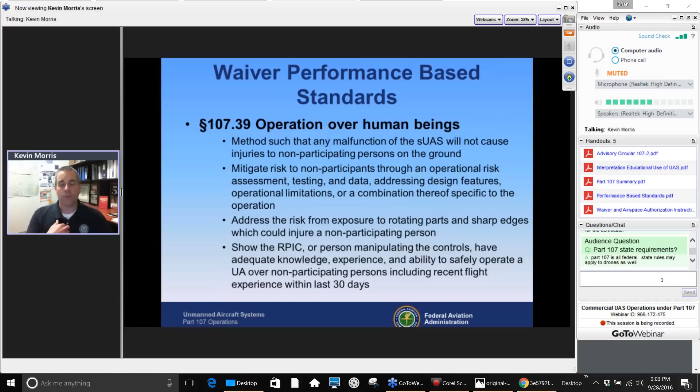So what that means to me is, if you haven't flown a small unmanned aircraft system for 3 months and you apply for this waiver, you may not get it. Now, operating in certain airspace, this is the ATC waiver, and it's going to be a tough one to get. That's the vibe I'm getting, and I'm probably pretty close to that.

You have to have a method to ensure that you're going to operate safely and efficiently without obtaining clearance from air traffic control. You have to have a way to be contacted by ATC because you are in their airspace. But really, for this one, you're going to have to explain why our authorization process won't meet your needs. You have to say it's too burdensome, or some reason, and I honestly can't think of any right now. Maybe you guys can, but you have to demonstrate some sort of reason to say, look, the authorization process doesn't work for me, I need a waiver from this rule.

You can get waivers for certain operating limitations. You want to go faster than 100-mile-an-hour ground speed? There is a list of performance-based standards you can see on your screen right now that you are going to need to demonstrate to the FAA. If you do, and we agree, you can get a waiver to operate faster than 100 miles an hour ground speed.

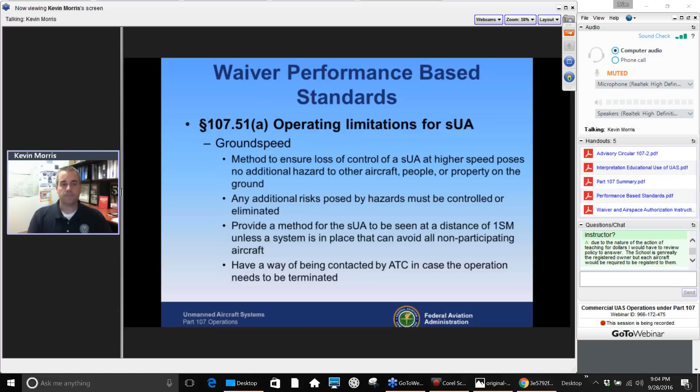The same thing goes with altitude. You want to operate higher than 400 feet, or not within a 400-foot radius of a structure, you can get a waiver for that. Again, looking at the screen, you're going to have to let the FAA know how you're going to meet all these methods and requirements. I can't emphasize enough, if you're going to request a waiver, be familiar with the performance-based standards.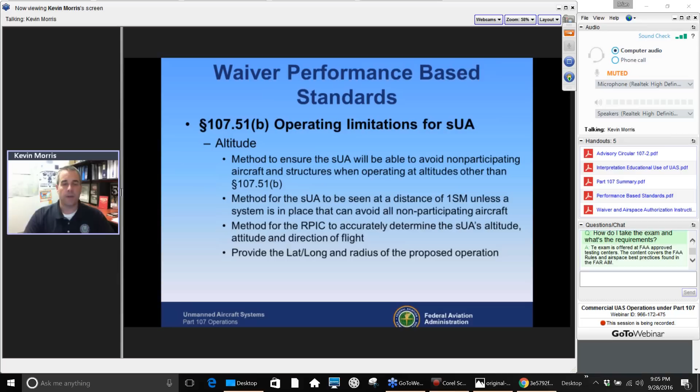Download that handout I have, so when you submit your application, we don't have to ask you all this stuff, like whether you identified that you could be seen at least a 1 mile distance. If not, now we got to ask for more information. If you have everything up front, the process goes quicker.

You can get a waiver for minimum visibility. You want to operate with a mile visibility instead of 3 miles as required by rule? You can get a waiver for that. Performance-based standards are going to identify what you need to let the FAA know and how you're going to comply with certain requirements of that standard.

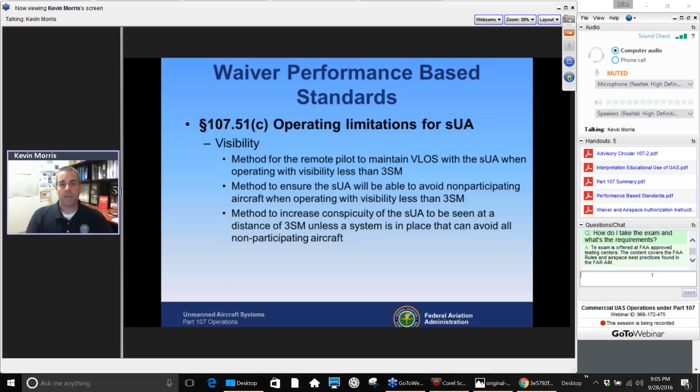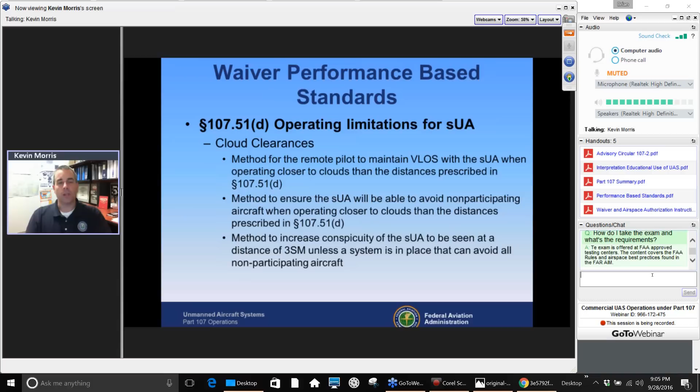Cloud clearances. You can operate closer than 500 feet below, or maybe closer than 2,000 feet horizontally to a cloud. Again, performance-based standards, you have to have these situations or methods identified in your application to the FAA so they can say, they want to operate closer to a cloud, that's fine, they've met these requirements, we're going to issue the waiver.

Now, the other half of that box, the ATC authorization, and this is where I want to clear up a little bit of miscommunication, since questions have been coming through. You only have one box to check for an ATC authorization, and I'll state it again: the only authorized way for you to receive clearance to operate in Bravo, Charlie, Delta, or within the lateral boundaries of Class E to the surface, is through our online portal. If you call ATC directly, they should be telling you that. I'm certainly telling you that from Flight Standards. Now you guys know, and that is the only process.

We are not approving airspace authorizations until October 3rd. That'll be the first date we start to issue airspace authorizations, and it will be for Class Delta and Echo to the surface airports. The next big date, I believe, is October 31st, for Class Charlie airports. The last big date will be December 5th, for Class Bravo airports. But nonetheless, Bravo, Charlie, Delta, Echo to the surface, you must submit your ATC authorization request online.

So I'm going to explain a little bit more about that here. You check the box that you're requesting an authorization. You're not requesting a waiver to operate in ATC Class Delta, you're requesting an authorization. You're going to need to specify the maximum altitude in AGL.

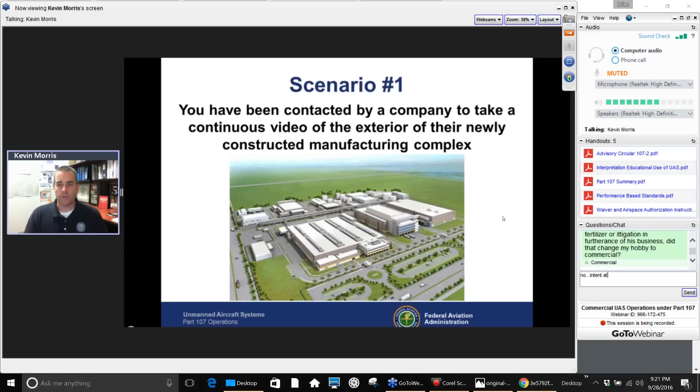First thing: assuming you've got the appropriate UAS and you can do that mission with the software and hardware you have, here's where that manufacturing complex was just built.

By a show of hands, and you're going to need your little grab tab here to use your show of hands, how many people would say that they do not need to contact air traffic control prior to operation?

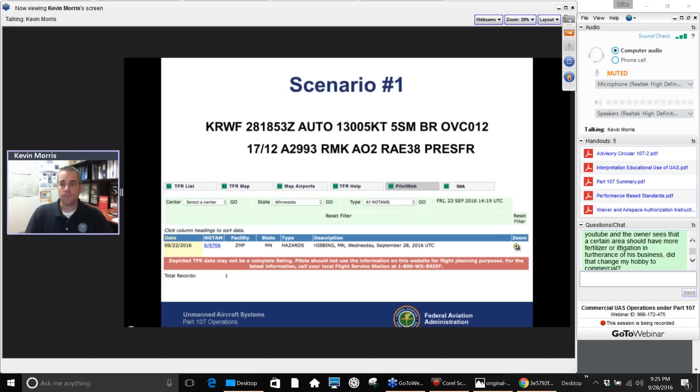Now, how do I make a continuous video shoot of the exterior of this facility? One idea brought up earlier by Aaron, one of our panelists, is to stand on top of the building, maintain visual line of sight, and fly my UAS all the way around. I said, well, that kind of shot a hole through my whole plan, but certainly that could be a possibility. If you stood up there, got the shot you wanted, and could see your UAS the entire time, that would absolutely work.

What I was going for was that you can definitely make a continuous shoot around this by exchanging controls and remote pilot in command authority. Let me get out my pen here.

Assuming you have a UAS capable of exchanging control and can make the flight, if you had one remote pilot in command here, one over here, another one here, and one over here, technically speaking Part 107 would allow you as remote pilot number 1 to launch that device. At some point, transfer control to remote pilot number 2, who also assumes responsibility as remote pilot in command for that UAS. They now have to maintain visual line of sight as it comes around the corner until it gets about here.

I think you guys are starting to see the idea. There's a handoff that takes place. They operate it here, a handoff takes place, it comes back over here around the corner, some sort of handoff takes place, and it comes back to remote pilot certificate number 1. Part 107 allows this. You can put remote pilots in command in those positions.

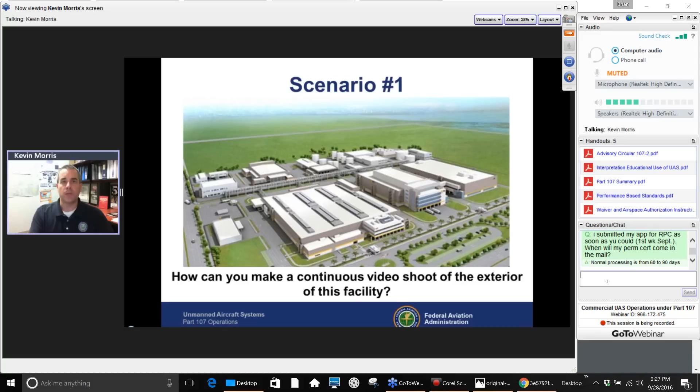I did see pop up, why not use a visual line of sight waiver? That's a possibility too. You could apply for a waiver and do this beyond visual line of sight. Absolutely, great question.

Now I'm going to add a little bit to this. They want you to film a couple of towers that they put up there. There's the towers on the map right there. And you're going to have to do a little bit of math here.

Generally speaking, what's the maximum altitude over a structure we can fly a UAS if we're within 400 feet of that? Answer: 400 feet, right? If a structure is 1,000 feet tall, we could fly up to 1,400 feet AGL and still be in compliance with Part 107, as long as you're within a 400-foot radius of that structure.

But I want to give you a real-world scenario here. Remember, the weather was overcast skies at 1,200 feet AGL. Looking at the map—and because I don't expect you all to read a sectional chart yet—these towers are 450 feet AGL. That's the number in parentheses below the 1,455 feet, which is the MSL number. So 450 feet AGL.

Based on that weather, could you operate over those towers? Answer: yes, you could. How high could you go, though? Remember, the cloud clearance requirement is that you have to be 500 feet below any cloud. So if the cloud layer is at 1,200 feet above ground, and we have to be 500 feet below it, simple math gets you a number of 700 feet AGL in order to maintain your cloud clearance requirements.

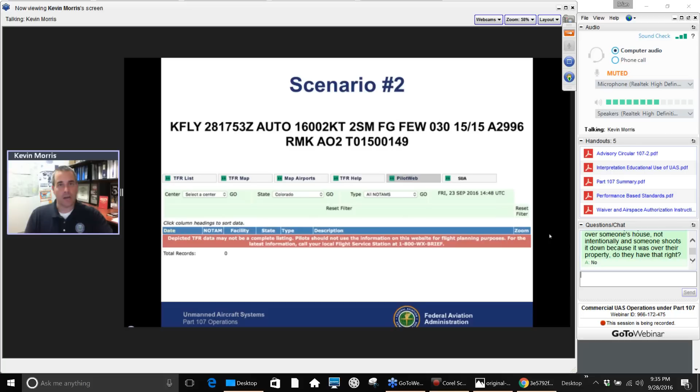Here's another scenario: a wakeboard school has hired you to film their students from their boat with your UAS. Okay, they want you in the boat, flying your UAS from the boat as they're pulling their wakeboard students. All right, seems like a reasonable request. Can we accept this job under Part 107?

The answer is, yeah, probably. But what do we have to consider? One, we'd have to consider what airspace we're in. For the purposes of this discussion, let's assume that this lake that we're on - it's not underneath a wildlife refuge, it's not part of any national park, it's not right underneath the airport runway. It's kind of out in the country.

So airspace-wise it's okay. The question I have for you, by a show of hands, how many people feel it's legal under Part 107 to film this particular mission from a moving vehicle - in this case, a boat? Show of hands, how many people say that's legal?

That doesn't look like it's densely populated to me. It looks pretty sparsely populated. So yeah, absolutely. You consider weather, you consider NOTAMs, you consider airspace. Part 107 allows you to operate your UAS from a moving waterborne vehicle as long as we're not carrying personal property for hire, or transporting personal property, or doing it from an aircraft, and we're over a sparsely populated area.

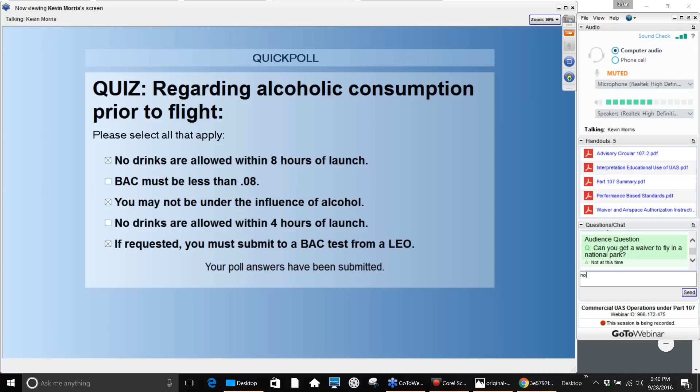And the last one, which got about half the people selecting, is that you have to submit your blood alcohol content before flight. We don't have a rule specifically that states you need to do that, but most states require you when you're operating a vehicle — and in Minnesota they consider a UAS a vehicle, just like an aircraft is considered a vehicle — to submit to a breathalyzer or blood alcohol test from a law enforcement officer. So if you're approached by a law enforcement officer, that's probably not the best time to try to pretend you have some sort of diplomatic immunity. I would comply with them and work with them on that, because I can't speak for every state, but certainly in some states, Minnesota included, it's required to do a breathalyzer test.